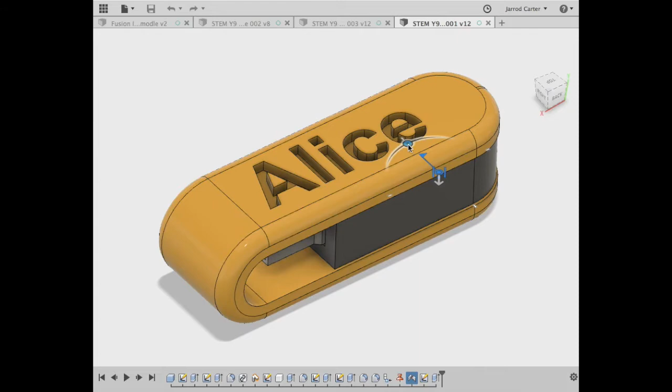The long-term goal is that you can design and 3D print your own USB flash drive cover. I've got an example of a flash drive design in Fusion 360 here, so you can see the flash drive. Your long-term goal is to 3D print some covers, then add the electronics and test your design. Here's one design I've done already in Fusion 360.

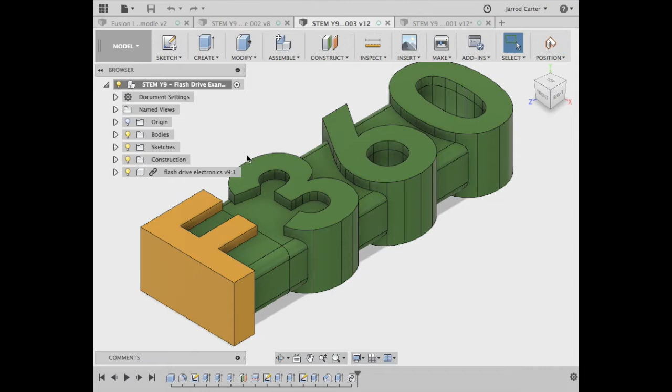Here's another design with a lid. I'll just hide that lid so you can see the electronics. If I hide the electronics, you can see I've left a cavity that we can glue the electronics into. So we would 3D print this part here and the case.

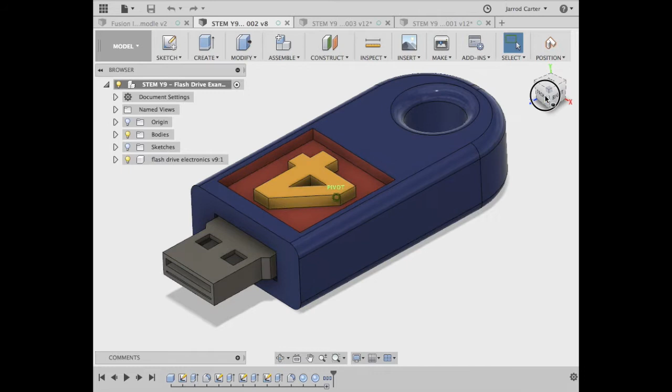Here's just another example of some of the things we can do on Fusion 360. This one's a bit more simple, just a one-piece design. You could see that we could 3D print this shape, then you might paint these colors in here and add your electronics.

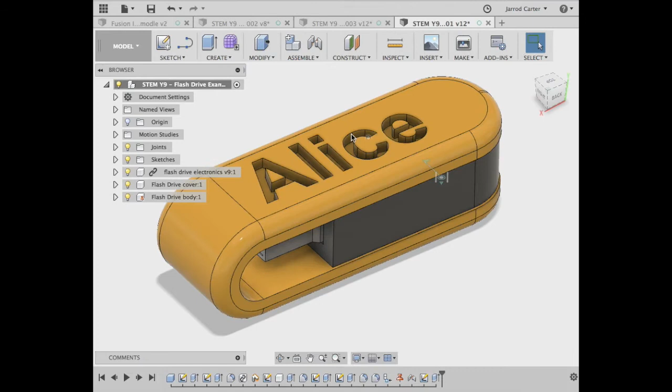Remember, the goal is just to give you some basic tools today in how to start CAD modeling in Fusion 360. So we're not going to start you off with something really complicated like this one here. We're going to start you off on something a lot simpler, so we're going to do this one here.

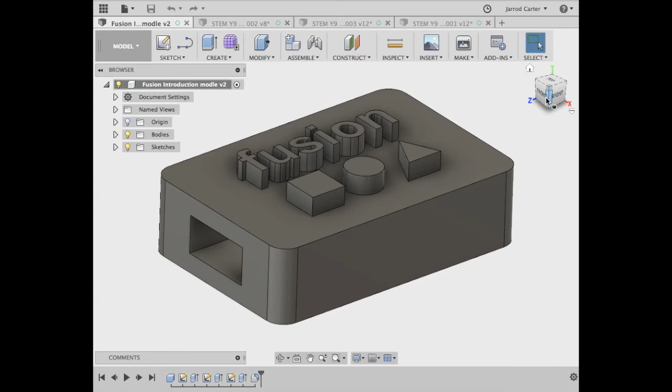As you can see, it's a very basic shape, but the reason we do this one is it's not too much of a stretch of the imagination to see that this is really the basic shape of a flash drive cover. If I look at this one, we've got the text on top and the cavity for the USB. With a bit of imagination, if you can build this shape, I'm sure you can build up to doing something like this. So that's the first reason we're going to build this as our first Fusion CAD model.

The second reason is I want you to look down here. This is what we call the timeline. As you can see, it has all these features, and this goes from start to finish of how I built this model. Each one of these is a step that I did from start to finish to build this. If you look, there are only 8 steps here, so if you can master those 8 steps, you're well on your way to learning how to use the software.

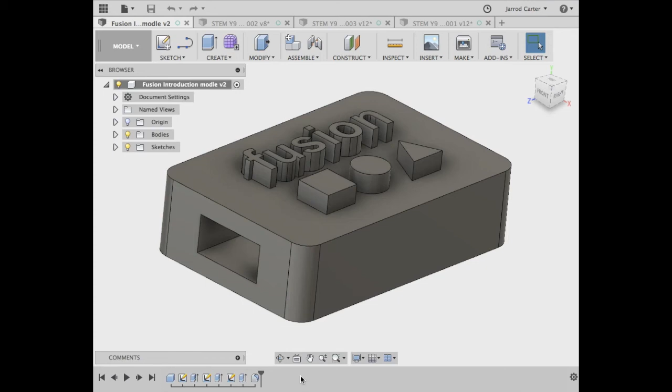The great thing about the timeline is, just like Michael J. Fox and Back to the Future, I can go back in time myself and look at this. I'm just going through the model. If I get right to the start where I had nothing, I can press play and it will take you through all those steps that I did to create the model.

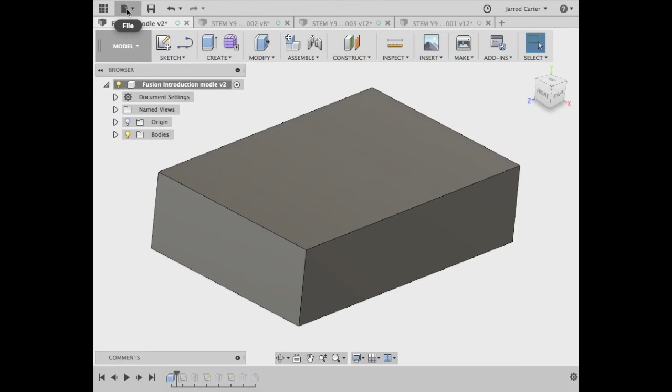So the first step we're going to learn is just to do this basic rectangle or cube to get us going. Up here is your basic file menu, so go File, New Design, and we've got different menus up here. We want Create because we're going to start creating, and I'm just going to use a box.

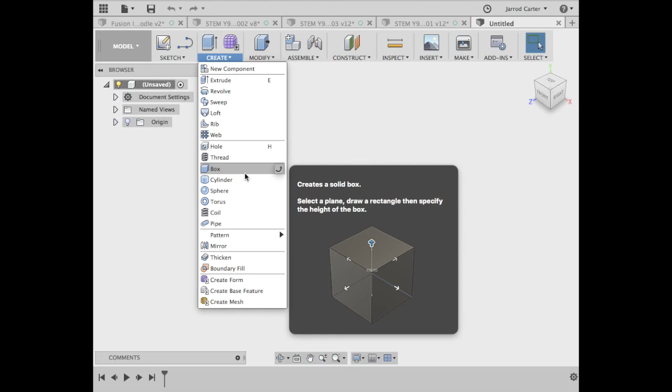Now these shapes here, what we call primitive shapes, we can use these to start a model, but after that we'll use other features. So only use one of these primitive shapes to start your project. I'm going to say box, and Fusion's saying, hey, where do you want to put that box?

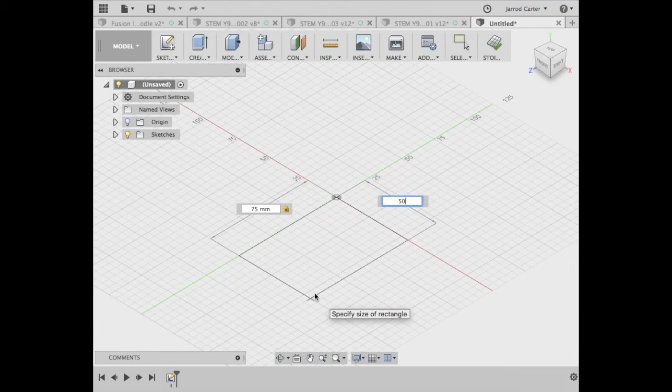I'm going to put it here and draw the basic 2D shape of it. I'll go about 75 that way—I've just typed in 75, this is millimeters, so that's 75 millimeters. And this way, no, it's probably a bit big, I'm going to go 50 millimeters. Okay, no sorry, I've moved the mouse. Yep, and then I hit enter, and it creates my shape, but we've still got to tell it how high.

So over here is the dialog box. 50 millimeters is a bit high for me, so I'm going to say 25 and hit enter. Beautiful, we've created our first shape. And if you look down here in the timeline, you can see that first step's already there.

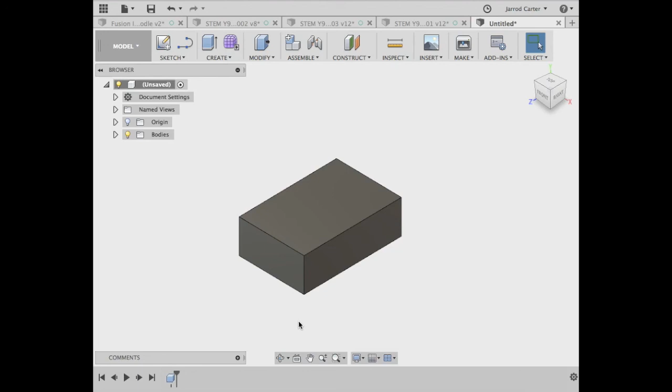Now, the good thing about Fusion 360 and computer-aided design is you can always go back and edit your steps. So I'm going to double click on this one here and go edit feature. Let's say I thought that was a little bit too high, let's change it to 20. Enter. Excellent, so we've done our first step already.